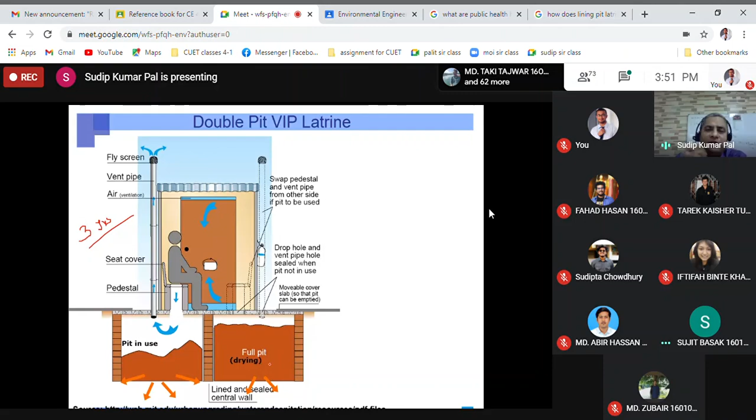Okay, so as you can see, this is the improvement over the ventilated pit latrine. So using the double pit latrine, but it becomes costly anyway. So costlier than before, but rather than 1 pit latrine, the 2 pit latrine system is always better. I mean, it is also suitable for more users.

So in a family, if there are more users, then there is a chance the pit can get full very quickly than the design life you estimated. And sometimes it is also a solution where the groundwater table is very, very high. So in that case, you cannot go deeper. I mean, the depth of the container or pit can be reduced. In that case, you can use a shallow pit and then a twin pit system or double pit system. So this is one of the advantages it has.

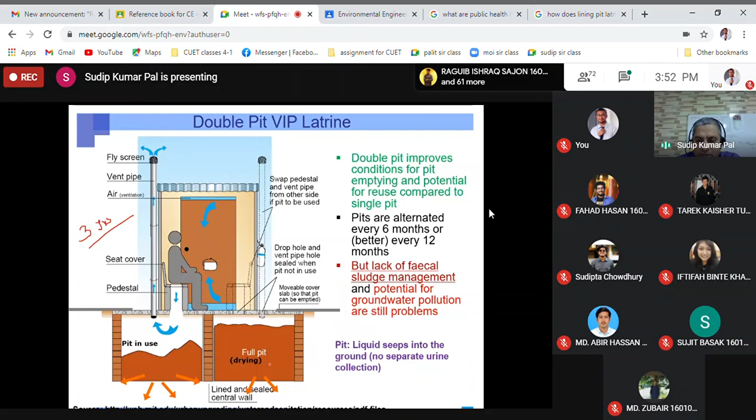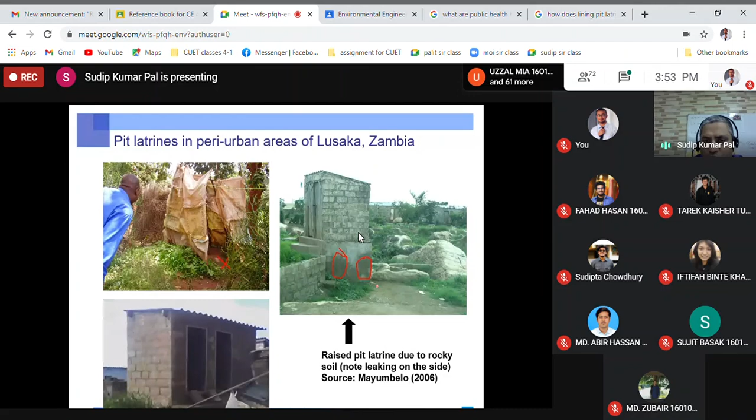So this is where you can see the same latrine is leaking because of the poor construction. Here also it is almost full and leaking openly. So this is the same area. We talked to the people, and people say that the pit latrine is used by 3 households. As you remember, when we discussed the pit latrine, we said that it must be private. It's not a shared latrine.

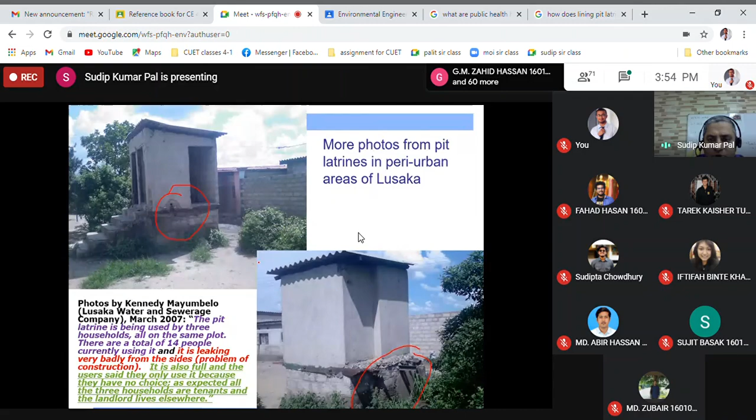Okay, but still people use it because they don't have the option, they have no choice. It's leaking because of the problem with the construction, and the people using it are not the house owner, so they do not know they have to clean it and how it will be cleaned. As they don't have the option, they are still using it in an inappropriate way.

And these are typical problems with pit latrines in peri-urban areas, because of the soil, because of the construction. Sometimes it's breaking down, sometimes it can be used as a solid waste dumping site. So there are many issues with the pit latrine. Basically, it's just not properly used.

And since this is constructed away from the home, it must be away. This is not a latrine where we can say it is an attached bath system. So this is obviously an off-site system. So in that case, security is a big issue, and sometimes maintenance is really difficult.

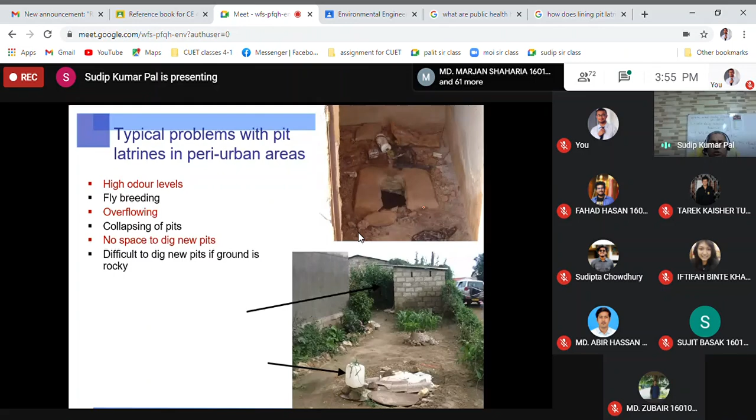So these are some problems in the field we have seen with pit latrines, like high odor levels, fly breeding issues, overflowing, sometimes pit collapse, and sometimes no space to dig new pits. If the ground does not permit infiltration, like a rocky area, then it's very difficult.

Sometimes there is no system to empty the pit, and this is also the case for Bangladesh, because we do not have a fecal sludge management system everywhere. But pit latrines you can find everywhere in the rural area, yet there is no such fecal sludge management system. So, lack of fecal sludge management system.

Pit latrine security is an issue, and then groundwater pollution is happening in the drinking water from very close shallow tubewells, as we already discussed. Sometimes this can be used to dump rubbish, like a solid waste container.

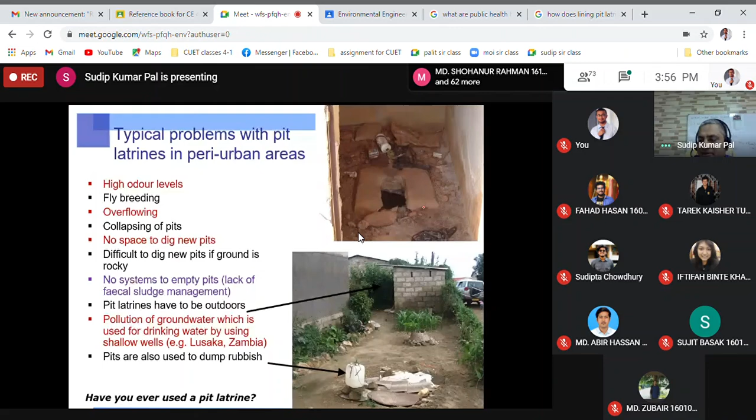And if you have ever used a pit latrine, this is the question to you. Have some of you seen a pit latrine, or do you have some idea about using this? Yes or no? Maybe no is the answer, because you are the lucky people. You do not have this experience. Have you? Yes or no? No, sir. Good, because you are lucky. You do not use pit latrines anyway.

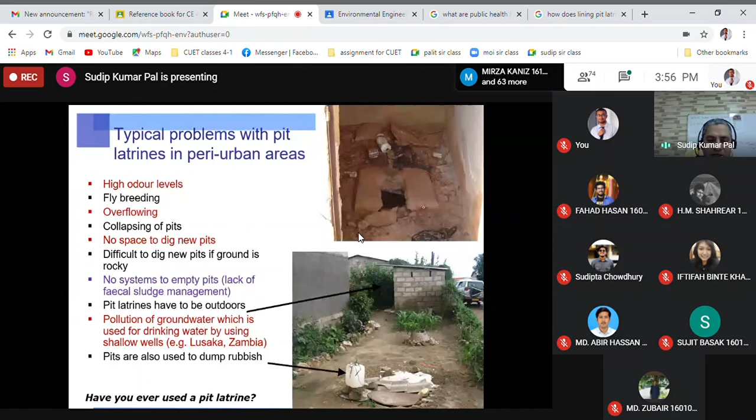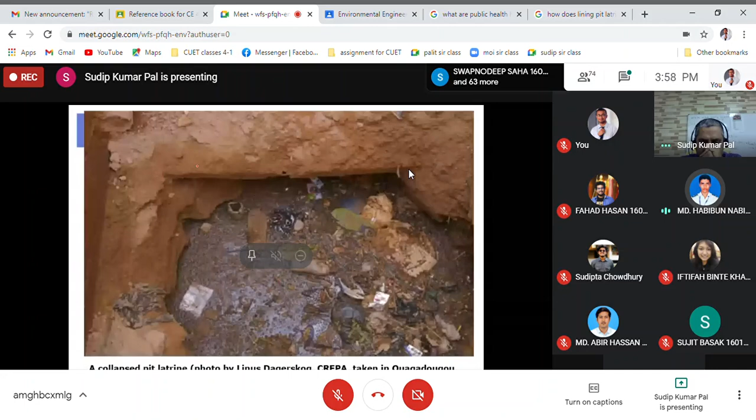Can you identify the probable reason for the collapse of this pit, looking into the picture? Sir, weakening of the soil due to water infiltration. Weakening of the soil due to water infiltration.

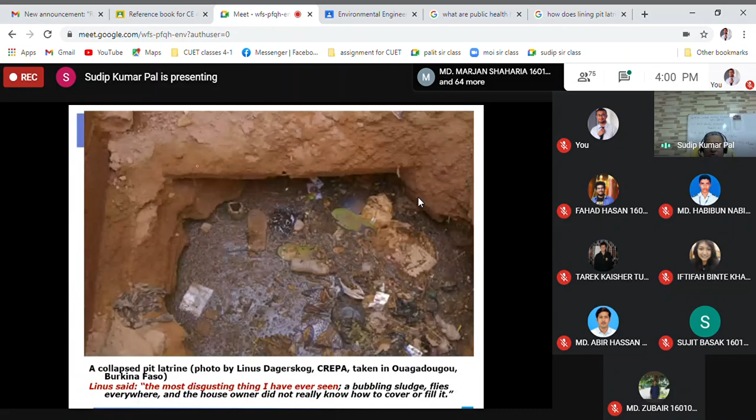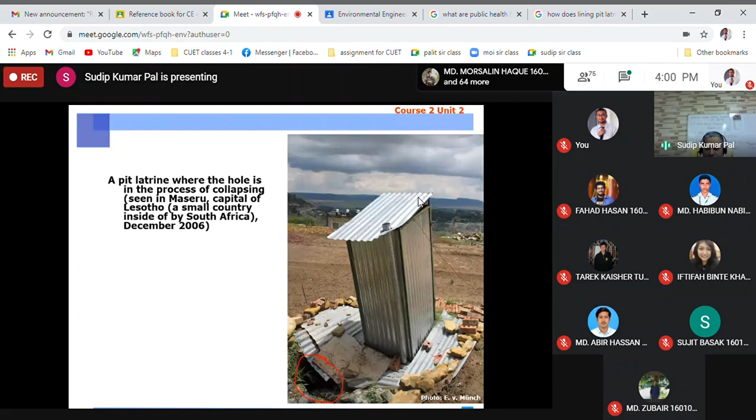The hole is almost collapsing. You can see the hole here, you see? It has already become a hole, covered somehow with bricks. It's almost about to collapse.

Okay, but this is very popular. Why it is popular is coming next. So let's say it is popular, but it is not actually a sustainable solution. Why? Because if the groundwater table is very shallow, then there is a huge chance of pollution.

Okay? If there is a problem of flooding, then there is an issue because this is an unlined pit, so flood water can wash out a huge amount of pollutants. No space: if there is no space to dig out the pit or empty the pit fully. And even emptying is not guaranteed to be sustainable unless you treat it.

So the treatment, even in Bangladesh, we are lucky that we do not have open defecation. By statistics, we have zero open defecation. So at least people have pit latrines, but still the figure is not really good enough, I should say. But we do not even have adequate treatment facilities for our septic sludge or fecal sludge. So unless we treat it, this is not complete sanitation, unless complete treatment is being ensured.

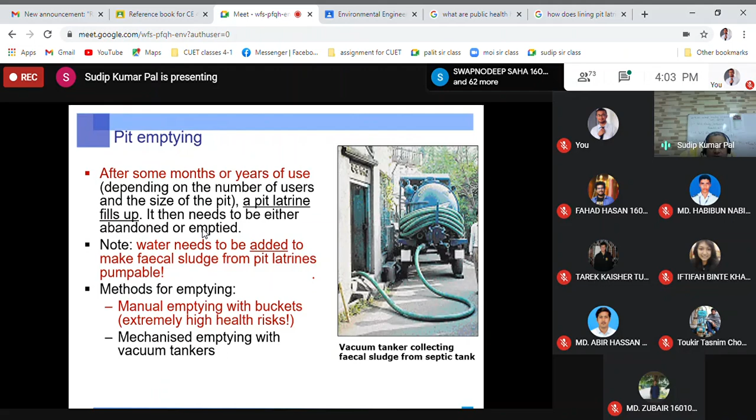But also obviously the pit emptying system, because manual emptying is not allowed, since extreme health hazards are associated with it. Still, even in the 21st century, we call a sweeper to clean the septic tank, but that is not really acceptable. It must have some sort of vacuuming system to clean the pit, and then a vacuum truck will carry this septic sludge, or the excreta or wastewater from your pit or septic tank, to the fecal sludge treatment plant, and then it will be treated. But in Chittagong city, we do not have these facilities available.

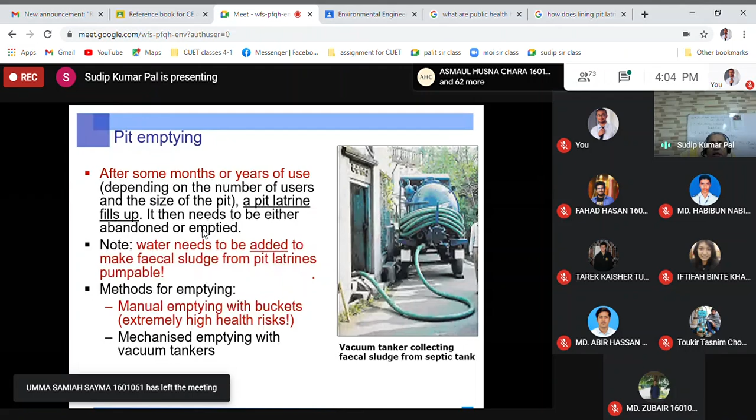Even Dhaka, I'm not sure, but I'm sure these facilities are not available even in Dhaka. Chittagong City Corporation has 4 vacuum trucks, but out of 4, 2 are already out of order, and the other 2 are still not giving any service to households for emptying septic tanks. This is under a project. JICA gave 4 trucks to City Corporation just for cleaning septic tanks. But 4 is not enough, and still it's not under practice.

But still, as I said, it is very popular, very widespread in low-income areas because it's very cheap. Anyone can construct it because the cost is very low. Another problem is the drop and forget mentality. You have a toilet here, you close it, you build a toilet in another place, and you do not know what is happening here. It can be appropriate if population density is very low, soil conditions are suitable for infiltration without any problem with the groundwater, and the groundwater table is deep rather than shallow.

Like in Bandarban, Khagrachari, Rangamati, it may be quite okay because the groundwater table is very deep where people live. And there must be good general security, no harassment for women and children at night, because this is not an attached toilet system. So sometimes there is a risk, so a good security system must be there.

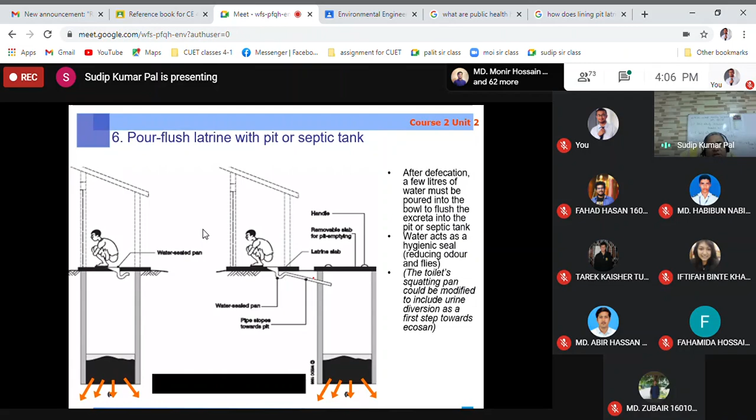So up to 1, 2, 3, 4, 5, the ventilated improved pit latrine, there is no use of water, as you can see. But later on, it has been seen that water is really necessary, not only for cleaning ourselves, but also to clean the superstructure and the media by which sludge is transferred to the tank. That is where the pour flush latrine comes in. Flush means flushing, pour means you pour water. So a pour flush latrine can be with a pit system or a septic tank system.

Nowadays we have septic tank systems, and we have flushing latrines. Flush means you flush it. Later on, improvement has been made on the squatting pan, or sometimes commode pan. This pan has a goose neck system. We call it the goose neck system.

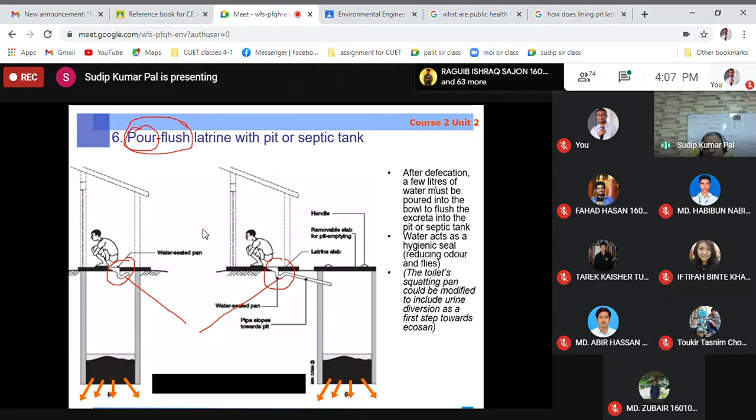This means that after defecation, a few liters of water must be poured into the bowl to flush the excreta into the pit. Can anyone tell me how much water we typically use every flush? Sir, 5 liters, 5 to 10. 5 to 10 liters.

Okay, so what advantage we are getting by flushing?